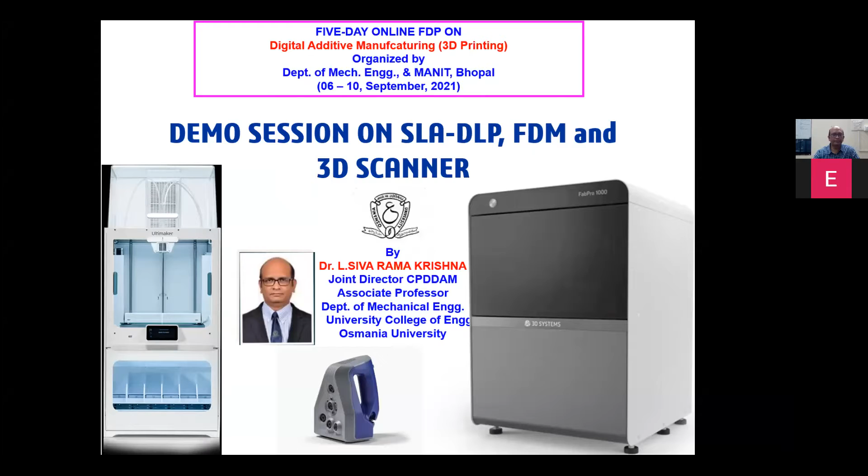I have shown and introduced the machine, how it looks physically. Since it's not possible to manufacture directly within the given time, we'll see a video already recorded showing different parts being produced using SLA technology as well as FDM technology, that is Ultimaker S5 Pro, and also the Artec 3D scan.

At this center, we have different technologies like SLM Metal 3D printer, SLS, SLA DLP, PolyJet, Ultimaker S5 Pro, and Artec 3D scanner.

We offer this to many students, research scholars, MTech and PhD students for carrying out project work. We also do it for consultancy work, etc. This is led by Professor Sriram Venkatesh, and I am the joint director for the center.

I hope these definitions and this classification are already familiar. So let us straight away start with the part machines.

FabPro 1000 is ideal for engineering and jewelry applications, small part prototypes, and direct 3D production across a wide range of high quality materials. You get high quality precision parts 3 times faster, with high throughput. It has 2 print platforms, 1 print tray as shown, connects through Ethernet cable, and supports different applications.

Basically, we have the stereolithography process. This stereolithography was the first 3D print technology ever developed in the world, developed by Chuck Hull in 1980, who is part of the 3D Systems company.

They have 3 technologies of SLA: laser SLA, SLA DLP, and MSLA. Let us see the basic difference between all these 3 technologies.

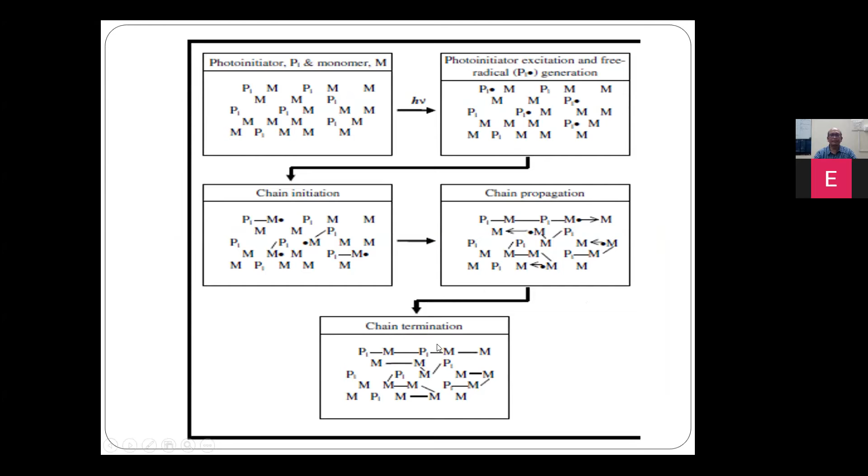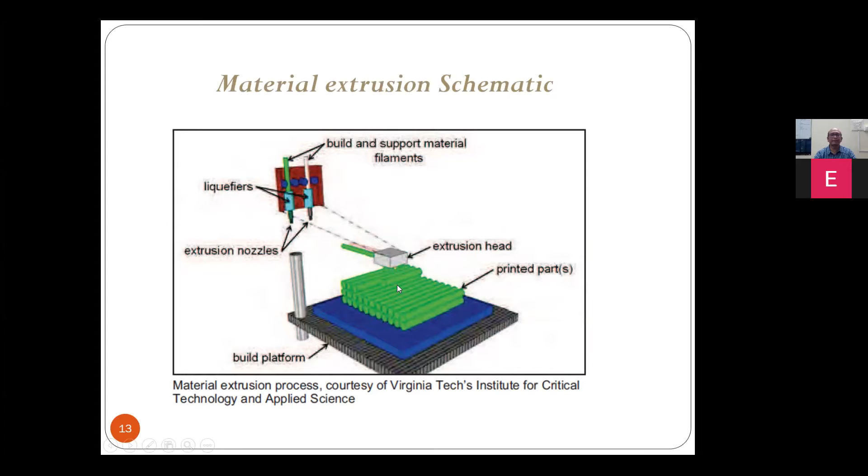And this is the material extrusion technology we have already shown, the Ultimaker S5 Pro. Basically, you send a spool of wire through two nozzles - one for the support structure and one for the parent material. Once the wire passes through the heated nozzle, it gets melted and fused. The nozzle moves in the XY direction, while the platform moves in the Z direction, combining both to give you a 3D printed part on the build platform.

From there, the information is sent to the software where the part gets built up. So we have just seen how the part gets captured with the camera.

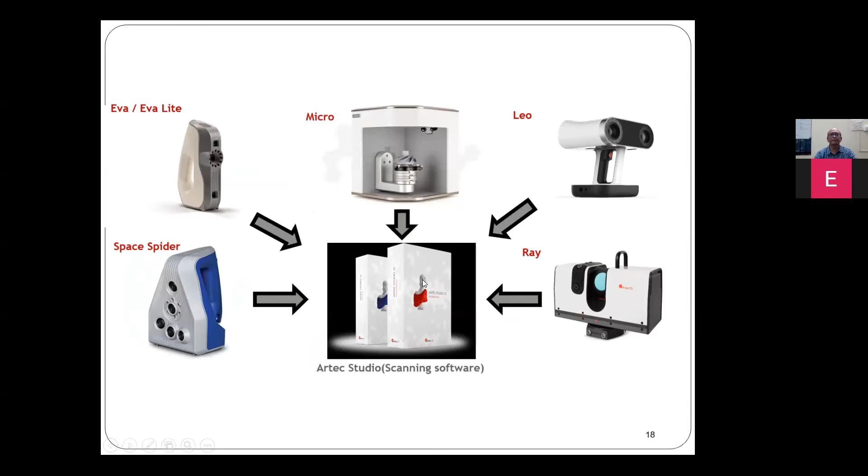There are different types of Artec 3D scanners, but we have this Space Spider model here. The software used for this is Artec Studio.

This is how the scanning process works, and once you scan it, the model you get needs to be cleaned, errors removed, and alignments done. Then you send it to the machine, produce the part, and do the post processing.

So this is what the Artec 3D scanner looks like. Let us see the different parts that you can scan.

Once you make the part as a CAD model, you can convert it into an STL file or OBJ file and get the colored parts. Once you build a CAD model, you can send it to FDM or SLA depending on the requirement, use the technology, and produce the part. These are different parts you can scan using the Artec 3D scanner.

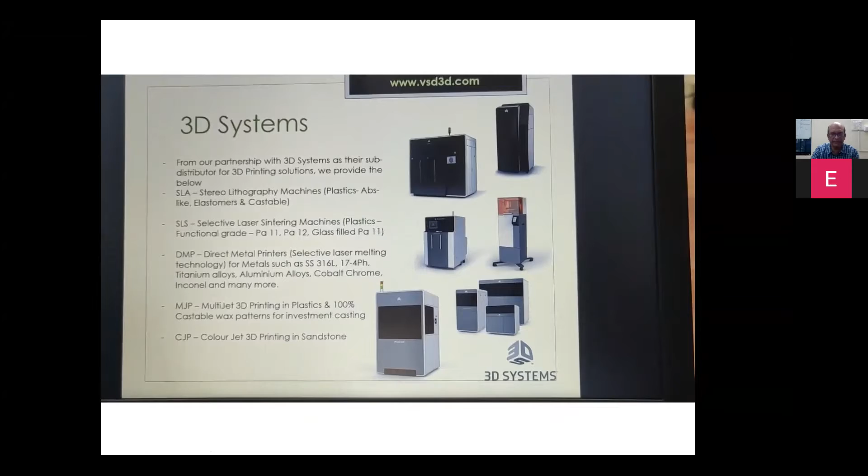3D Systems, and is the video audible? Multi-jet printing is for plastic, castable patterns, and CJP is for color jet printing in sandstone.

Today we are going to see the 3D Systems DLP SLA based FabPro 1000 3D printer, which is a desktop machine with a build volume of 125 by 70 by 120 mm. The materials we use here are Proto Gray, Proto Black, Flexible Tough Black, and NextDent SG, which is a biocompatible material. This machine is capable of not only processing the prescribed materials from 3D Systems, but you can also use any third-party materials that fall under the 405 nanometer wavelength of curing.

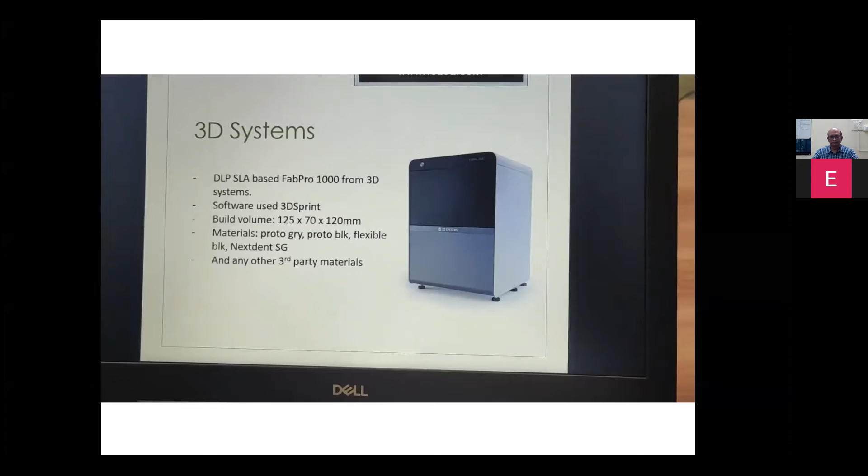So we will be taking you through this DLP SLA machine right now, and show you all the accessories, how the machine looks, its operation, and also the main software, which is one of the salient features of this machine.

It is called the 3D Sprint software. This software is one of the state-of-the-art software provided by 3D Systems, wherein you can handle all their plastic family 3D printers in one single software, and also generate reports which will be beneficial from a services point of view, and also for an institution to track machine utilization. So now we'll move on to the software first, and then the machine.

Friends, as you can see, we have designed this automotive bracket in SolidWorks software. Now we'll be saving this file as an STL file so as to move it to the 3D Sprint software. You can also save it as a STEP file and open it in the 3D Sprint software.

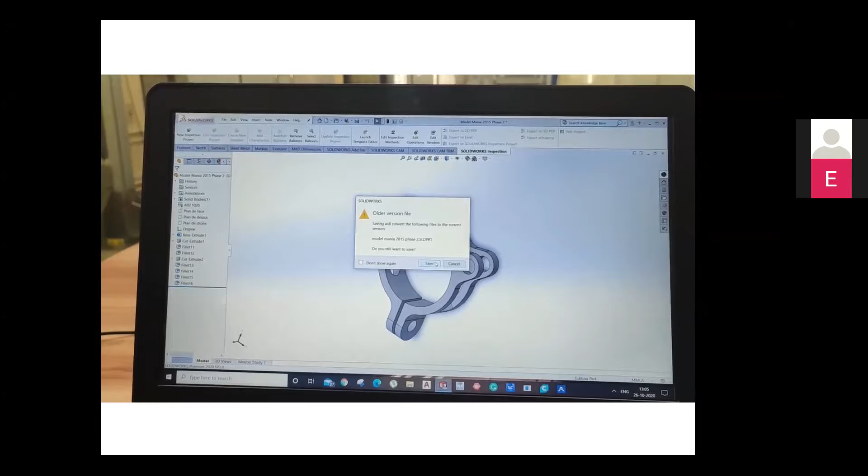3D Sprint software is capable of opening any kind of files. Even the native CAD format can be used by us to actually process the files and save them as per our need.

Okay sir, this is our 3D Sprint software. Here, as you can see, you have a lot of options like printer tools, file, generate geometry, and load reference. Various other options are not active as of now because we don't have any file.

So initially when we switch on this software, we first need to choose the printer, which once chosen will remain as the default printer for you. As we have FabPro 1000, you can see here this machine is selected as default.

Apart from these machines, you can select any of the 3D Systems plastic 3D printers from the huge array of machines provided here, so one software can handle any number of machines. So after selection of the machine, we go to the next step, that is selection of the material.

So this is Proto Gray. You have Jewel Cast, which is basically a castable resin, and then you have Tough Black, Elastic Black, Flexible Black, NextDent Model 2.0, NextDent SG, NextDent Ortho, and NextDent Model. These kinds of materials can be used, which are prescribed by 3D Systems.

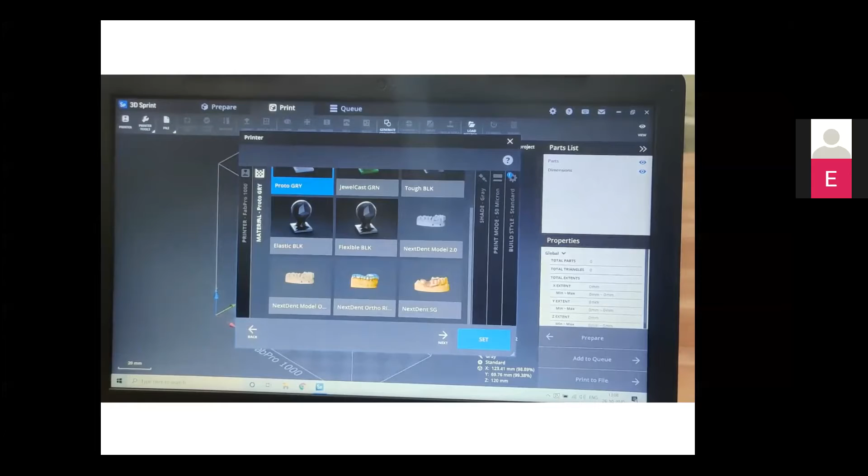Any other third-party material can also be used. So after this, since we have chosen Proto Gray here, our shade will always remain gray, that is prescribed from the machine.

Now we go and choose a print mode. So every material is basically given a default print mode. You can also create your own print mode by increasing the layer thickness or layer resolution in this.

After that, we go for the standard build style. I can have two build styles, and I can create my own build style also using this software. So presently we go with the default standard build style.

Once we set that, the software sets the whole thing and shows you the build volume of the printer. So this is the build volume of the printer, and as you can see, this mesh denotes that this is the bed basically.

And here you will have all the details of your printer: the FabPro 1000, its IP address, the material you are using, the layer accuracy you have set, the color, what mode it is working on, and the exact build volume you can utilize in the X, Y, and Z directions.

After this, we have the second option called printer tools. Now you can change the printer settings using these printer tools at any given point of time. Suppose you don't change it while selecting the printer, you can change it after selecting your printer tool.

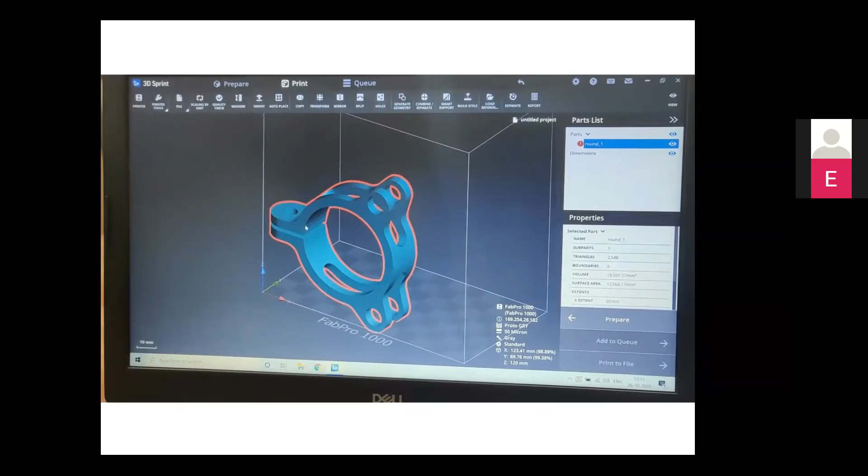So now we will use our options available here to basically take the part into the build volume and also place it according to our build styles. So first we would use auto place, an option which is used to move the file to the center or inside the build volume basically.

So if you have multiple files, all the files can be selected and you can put them in the build volume using the auto place function. Then we go to the orient function. Now this function is a very important function because it decides how you have to print the part basically.

So here you can use which optimization technique you require, whether it is the print time, the surface quality or the support area. So basically most of the time surface quality is preferred. So that is why we go for surface quality. Then the orientation is like this. Now it is moving out of the build volume.

So we can now go to an option called transform, wherein this feature helps you to move the file, rotate the file and also scale the file. So this is in move. Then you can go to rotate. You can rotate in any angle, any degree. You can mention the degrees and rotate, or you can rotate with X and Y values.

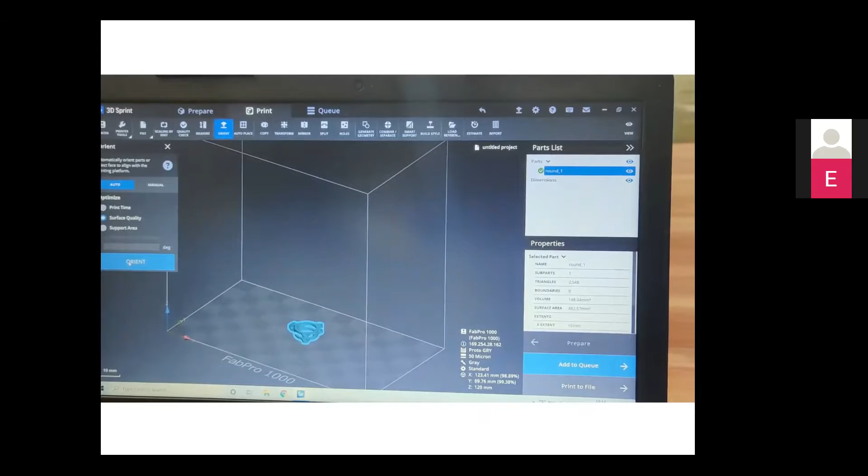Then we go to scaling. Now because the part is very big, we go for a scaling of the part, wherein we also keep in mind the timing of printing the part. So we have scaled it to 20% now. Now selecting the file again, we go to orientation and we go to surface quality, we orient it. And once we go to support area and orient it, it orients in a different manner.

So as you can see, if I choose support area and 30-degree angle, you can change the overhang criteria to 45-degree angle also. If you change the criteria to 45-degree angle, up to 45-degree angle, it will take the support structure. So accordingly, now we want a better surface quality, so we will go for surface quality.

After this, you have options like scaling by unit. You can change the scale of the unit. Basically from mm you can move it to inches, inches to mm, so for that this function is used. Then you can do quality check of the parts. The quality check will reveal wherever you have problems, whether it is in the printing volume or in the wall thickness, gap clearances, boundaries are open, or some geometrical defects. So all these the software will recognize by itself and give you the results.

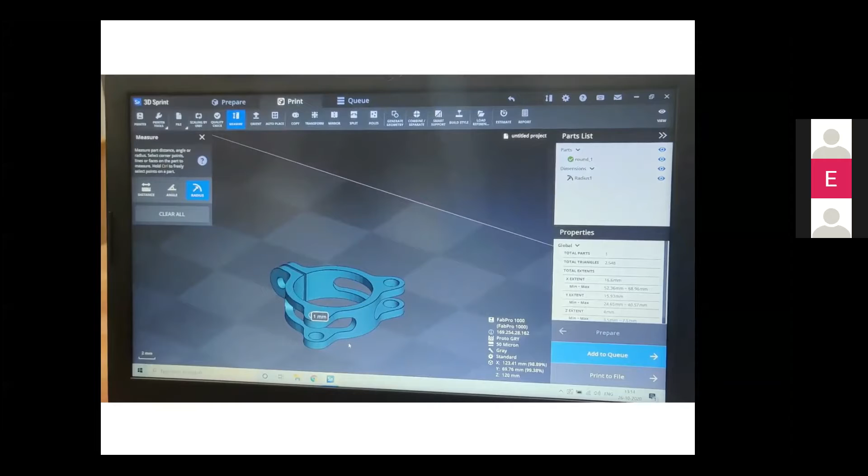Now we can go to measure. Measure is nothing but to measure from one point to other. First let's select the part. So we can measure the radius of this circle, which is 1 mm. Similarly, you can use angle and you can also use distance to measure all the measurable features of the part, basically. Now we have seen orient, we have seen autoplace.

Now copy is basically if you want to copy this part, suppose you want to make 4 copies of the part. So you can select the part and say set. So you can make 4 more copies of the same part and start working. Just say delete, like your Word file, you can delete all the files, and now we are back with one file. Now after copy we have transform.

We can transform. I have shown you scale, rotate and move. And then we have mirror. We can mirror the same part in XY plane or YZ plane or ZX plane. And then we have split. Split is an option. Basically if you have larger parts, you can split the part into 2 pieces and then print it, and later on you can join them as per your requirement.

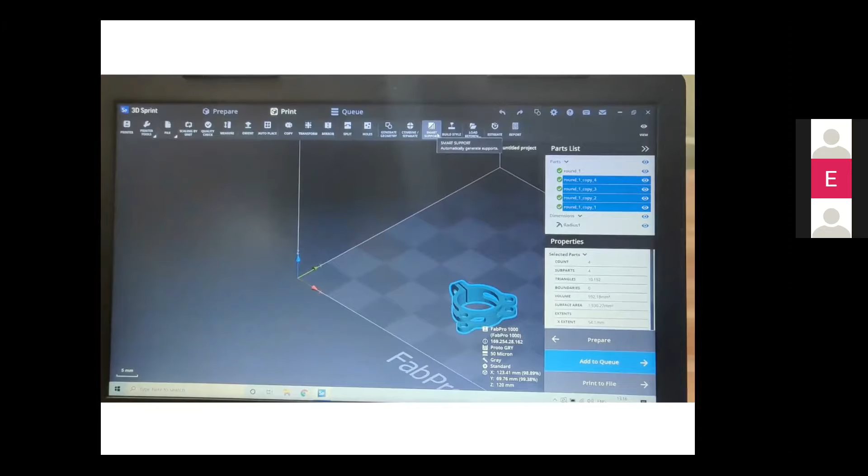Holes: if you want to create a small hole or a hollow structure, then you can use this function. And then generate geometry is basically to generate your own geometries, a box or a cylinder or something. And then you have smart support. So now we have selected this part, so we'll go to generate the support.

Now the best feature of this 3D Sprint software is that it generates the supports according to the technology, according to the part, and also according to what machine you are utilizing basically. So when we say smart supports, it generates smart supports. You can create supports. Now if you see, the supports are generated for this small part. You can see where all you have the supports in a 360-degree angle of the part. And now you can analyze your supports.

You can update the placements. So here you can analyze where all support is required. This is something which is decided by the system, so you can modify it. You can modify the points, you can add points, you can erase them. You can do all these functions in this part. And here where we generate, we can also go to the same generation and just remove the base truss. Base truss is nothing but joining the support structure at the bottom.

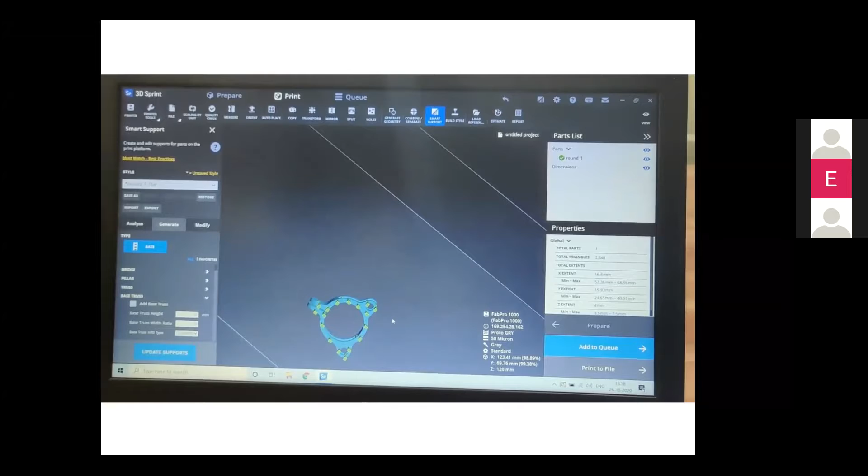So we can say 0, 0, and then just say create supports. So now you can see earlier our support structure was joined at the bottom. Now our support structure is independent for each support. Now the same way you can define the pillar thickness and how it has to offset. You can also define the bridge thickness if you are using bridges during your printing.

So you can decide what kind of supports are required and where you require them and where you don't, based on your design. So now we have prepared this file. It is in the center of the build volume and has all these support areas, supports already generated. Now we have already seen build style. We can use the same build style and we can go ahead, and then load reference is nothing but the reference files we can load which are saved in the 3D Sprint software to check the accuracy of the machine.

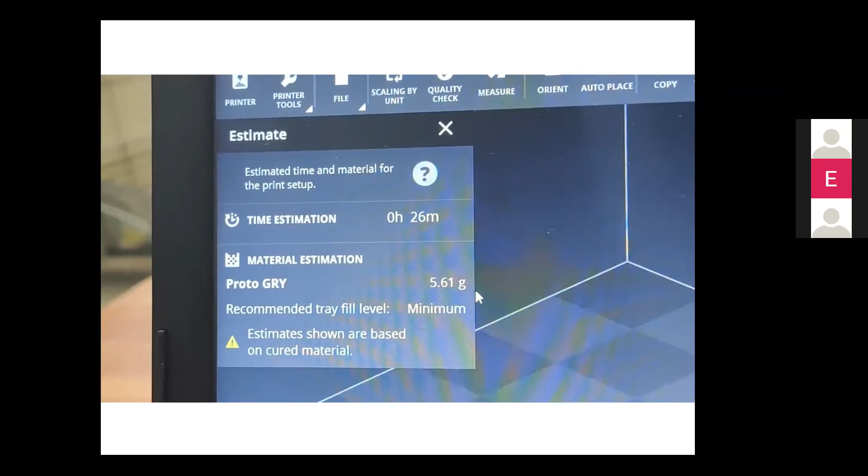And estimate is nothing but to give you a complete estimate of the printing of the part. Now this whole part, in how much time will it get prepared and how much material. So you can see here it shows you the time estimation is 0 hours and 26 minutes. Material estimation is Proto Gray 5.61 grams and recommended tray fill level is minimum. Now we'll explain while showing the machine what the tray level is basically, and what is minimum and maximum. So this is how it gives you an estimate. So with support structure, in 26 minutes your part will be ready. So this is basically the feature of estimate.

And then you have something called report. So this report will give you printer information, part properties of individual parts, print time and material estimation. And you can also save them as individual images. So you can create a complete Excel report out of this software of what parts you are printing and everything. Now to generally see what is the volume of the part, you can go to the properties section here on the right hand side corner. So here you can see the name of the file, subparts 1, triangles, and boundaries are 0. So volume is 148.04 mm cube, surface area, x extent, y extent and z extent. So this is how the part is basically understood by the system.

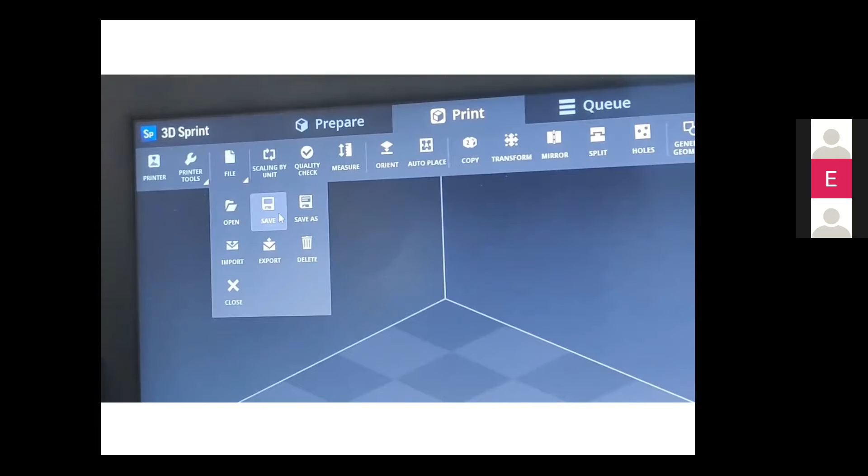So now we either can connect the FabPro 1000 machine via LAN, or we can also connect it using a USB. So basically we'll save the file and we'll transfer it. Now we have saved this file as a project in the software. Now in your system it has been saved as a project. So whenever you want you can open it for your reference.

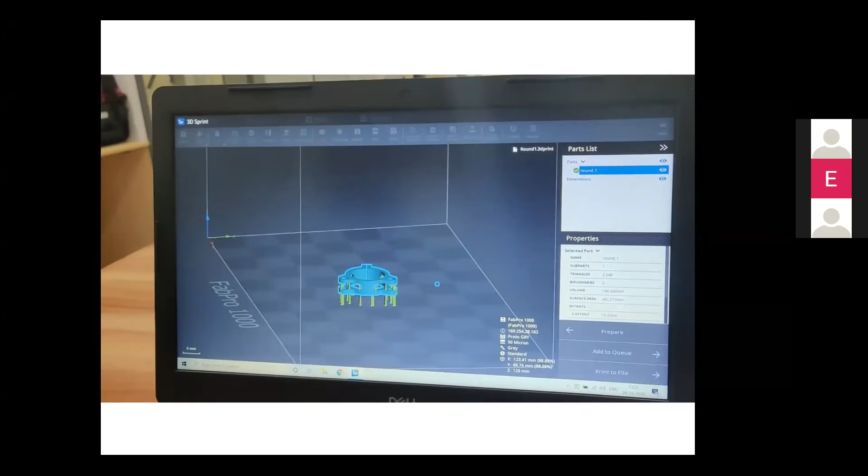Now you have 3 options here: prepare, add to queue and print to file. Add to queue is basically used when your system is connected over LAN. So once you say add to queue, it adds the file into the queue. Okay, so you can add the same job and you can rename it with your dates and everything, and you can add it. We are not connected over the LAN with the system, so we will go for print to file. So we will save this file here as a PXL file which the machine understands. So now we save this as round 1 PXL, and it is unable to connect and it saves the file. So it has said print to file is completed. So it prints as round1.pxl, and now we transfer this into the USB and we will take it to the machine.

Now coming to the machine, this is our FabPro 1000 3D printer from 3D Systems. Now you can see there is one operating button and a display screen here for the machine, and we have this material called FabPro Tough Black or Proto Gray, whatever you can use for printing the files. So today we'll be using this, and as we discussed earlier, we are operating this machine using a USB drive. So now this USB drive will be placed here in the USB port. You can also see you have a LAN port here, and this is the power port of the machine. So once you insert it, as you can see the printer is ready. So just hold the button, and it says hold button to continue to print the job.

So we have inserted the pen drive, and after a long press, now you can see the file name is being shown here, and it says hold the button to continue. So the same button we need to hold for continuation of the print.

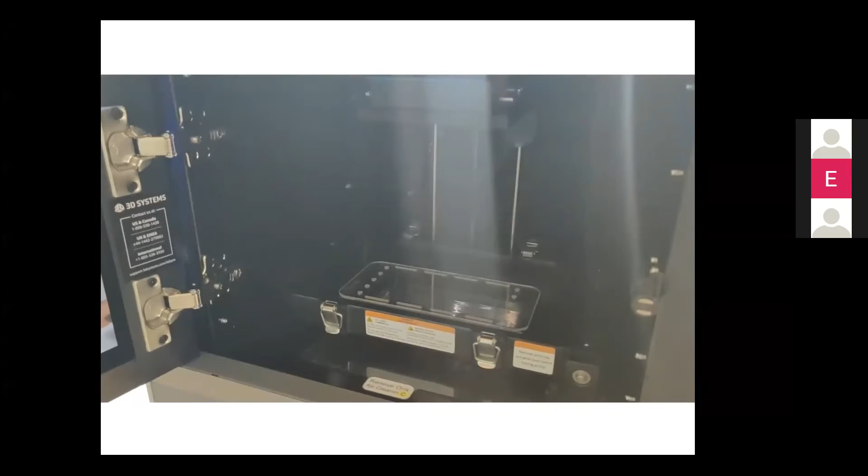Now I will show you what are the essential parts of this printer. Now if you can see this printer, this is the build area basically, and this is the glass which protects the film from the direct UV DLP light basically, and you have a DLP light at the bottom. Now you can see this is the area where the build plate is going to be mounted. We'll show you the build plate here.

Please come here. So this is the build plate of the 3D printer, and here you have a spatula to remove the parts after the print, and these are some scrapers given by them for scraping of small parts whenever you print. And this is basically a mixer, resin mixer, and then you have this, the film on which the complete resin has to be poured and the printing starts.

And then you have brush for some kind of cleaning activities. This is a tweezer for a cleaning activity, and this one also. So these are few essential parts, and this is basically IPA sprayer, and you have tissue papers. So these are few of the essential parts of the machine, and then we have some of the essential accessories which we call as the LC3D mixer.

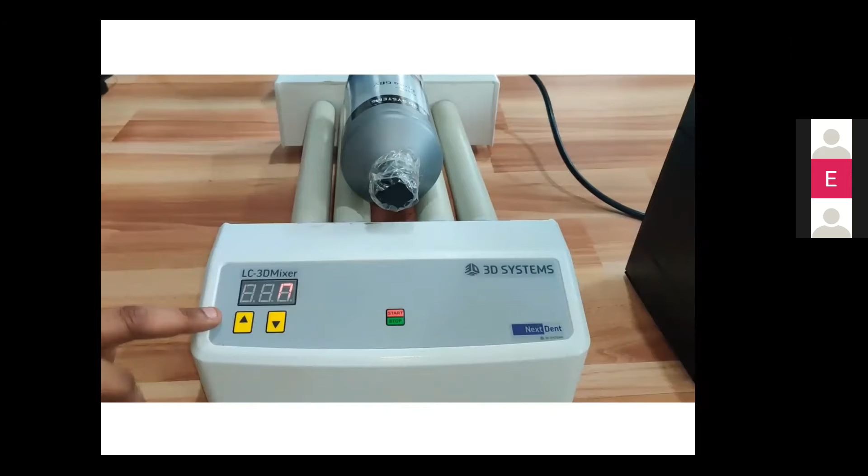This is basically used to mix the complete resins. When you buy new resins, you need to mix them thoroughly. Generally what people do is they catch this bottle and start shaking. Now that is not the real procedure to do it. You have a professional machine here which actually mixes the resin.

So we will just say start here. Once we say start, you can see how it moves the bottle in various angles and directions so that the complete resin inside the bottle is mixed.

And then we have a UV curing unit here, a small UV curing unit which uses the UV lights to basically cure your parts. You have to place your parts here. Small parts can be placed on this, or directly you can put the bigger parts on the bottom. So it starts, this is used as a curing unit.

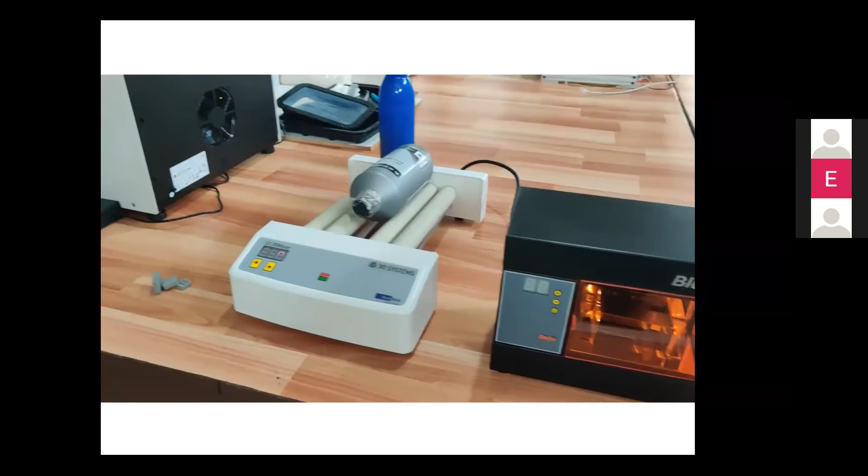So as our printer is ready now, we will prepare the printer for starting the print. So first we will mount the build plate onto the place given here. So we mounted the build plate, and this is how we lock it. So once the blue lever is pressed down, the build plate is locked. So neither the build plate can move or do anything.

So then we bring the resin tank. As you can see, it is written front here, so this should be on the front side. Now you place this resin tank onto the glass plate and then fix it using these clips.

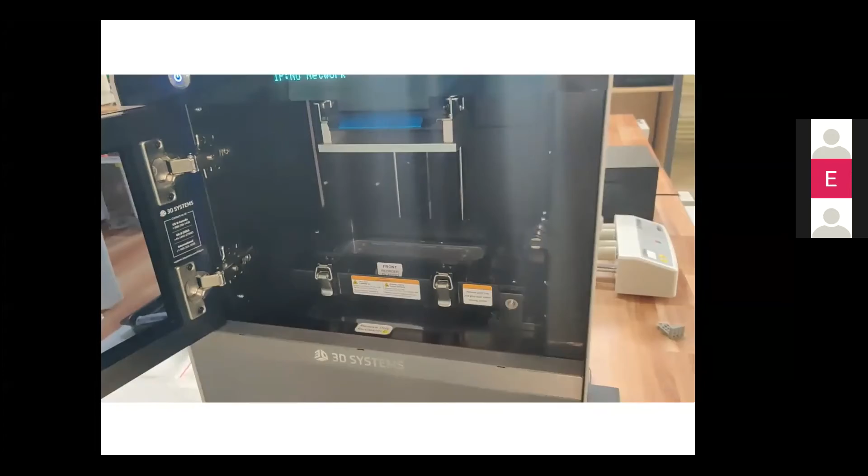Now we have to pour the resin. So now our resin is mixed completely. So we stop it, and this is a resin bottle. We will pour this resin onto the film here, as you can see.

There are 3 levels marked here, these are the 3 levels. This is level minimum, this is middle level, and this is the maximum level till where you can fill the resin. So as in our build it was said minimum, we will fill the resin to the minimum level. So once it is filled to the minimal level, we will remove the bottle.

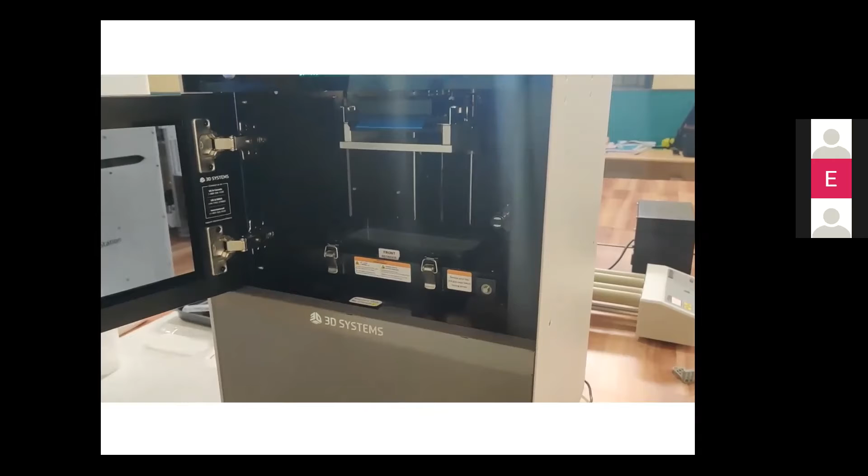Now you can see we have selected the file round 1 PXL. Now once our build is ready, the platform is ready, everything is ready, we just stir the liquid a bit using this stirrer which is provided by 3D Systems, just to have a uniform printing style in the whole resin.

Do remember, whenever working with your resins, you should always wear gloves, because these resins can harm your hands at any point of time. So basically now we have put the file using a USB, and now we hold the button and the job is loading. Once the job is ready, we'll also hold the button once again to start it. So it's verifying the build.

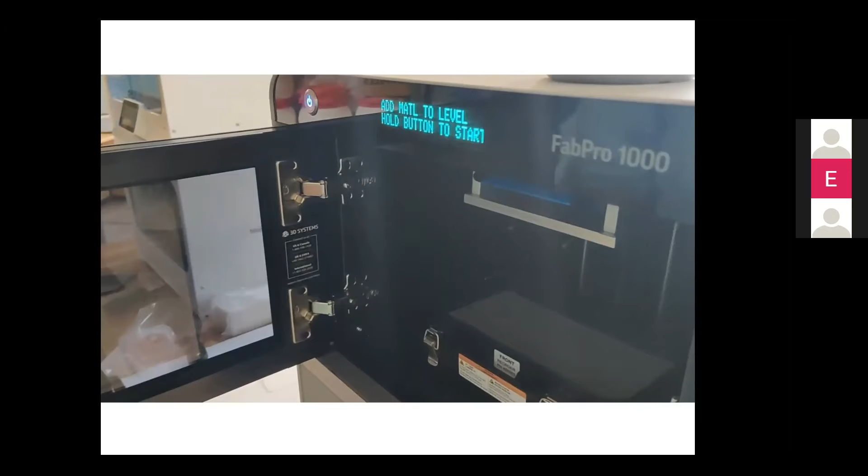Now it says please scan the material. Now if you can see, there is a red light here and we scan the QR code of whatever material we are using. So once it recognizes, it says add material to the level and hold the button to start. So we have already added the material, so we will hold the button to start.

So it gives you the printing timing. Now close the door and leave the machine for printing. See, the build plate goes down and gets dipped into the resin to start the print.

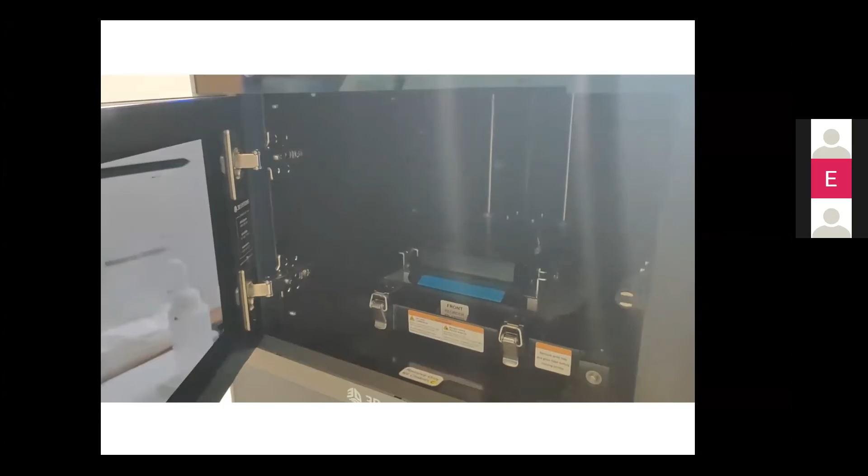Now the printing has started. So the first layers will start getting printed with the UV light from the bottom. It will cure the resin, which will stick onto the build platform and make the part. You can see it keeps updating the printing time and also the percentage. So you can see it is 5% done and 21 minutes remaining.

So now we'll see inside how it is printing. Now you can see this moves in Z direction, and also the bed moves in Z direction. And from the bottom the UV light actually cures the material to stick onto the build platform. This is basically how the printing is done on these kinds of machines.

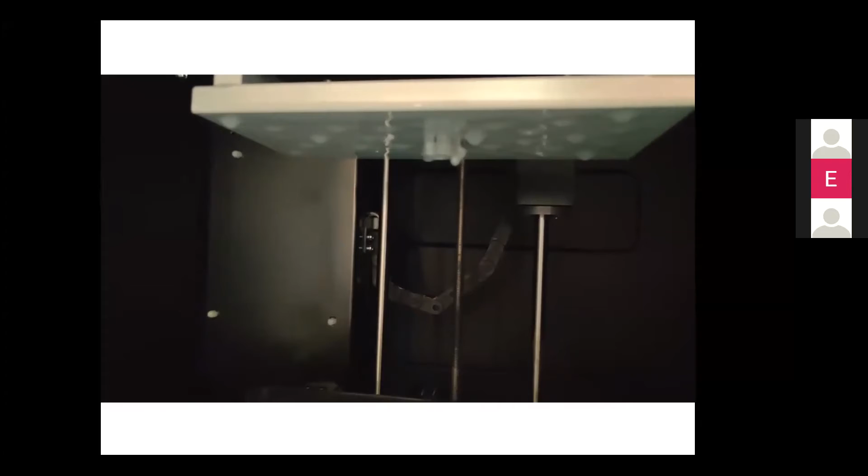So the part is printed, and this is how the part has been printed onto the build platform. Now you can see the resin dripping onto the build platform. That is the extra resin which drips. We have printed a very small part just to accommodate our timing. So that's how the part looks. Once the material drips completely, we will remove the part from the build platform.

Now we have removed the part from the machine and it is built. We will pour IPA onto it to basically clean the part, and then we use this spatula to remove the part. Now we have to dry it using a tissue paper.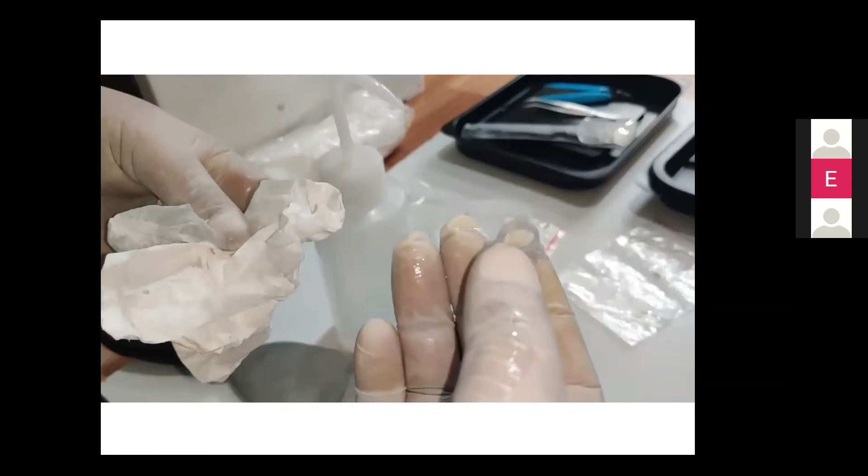And now you can see the part has been printed. The very small features of the holes are also printed perfectly by this 3D printer. So now we use the tweezers and various other post-processing equipment to remove the support structure.

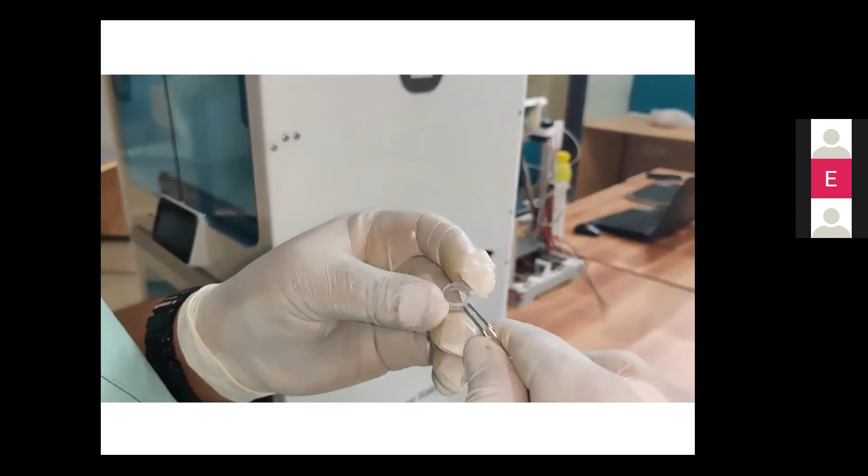Now after the part is completely cleaned, we take it for post curing into the UV curing unit. This is our UV curing unit. We place the part in the UV curing unit, close this and set the timer. It ranges between 45 to 60 minutes. You can start the curing.

So you can see, the blue light starts curing the parts inside the curing volume. We have a reflective surface at the bottom. These reflective surfaces are basically to reflect the light from all angles onto the part.

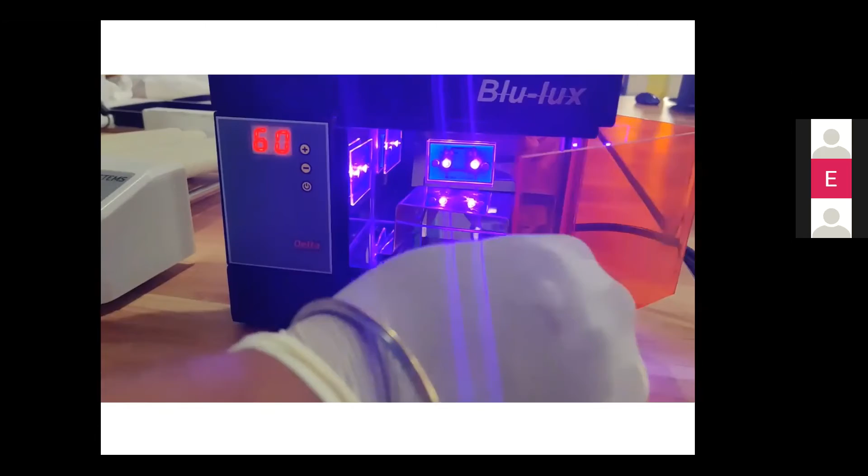After the curing is done, you can take the parts and start using them for your commercial uses, basically for automotive, for testing purposes, for prototyping and for design verification. You can also use them in basic engineering jobs, and you can even make architectural models and medical models. It depends on the application. After post curing, you can move it ahead for your prescribed application.

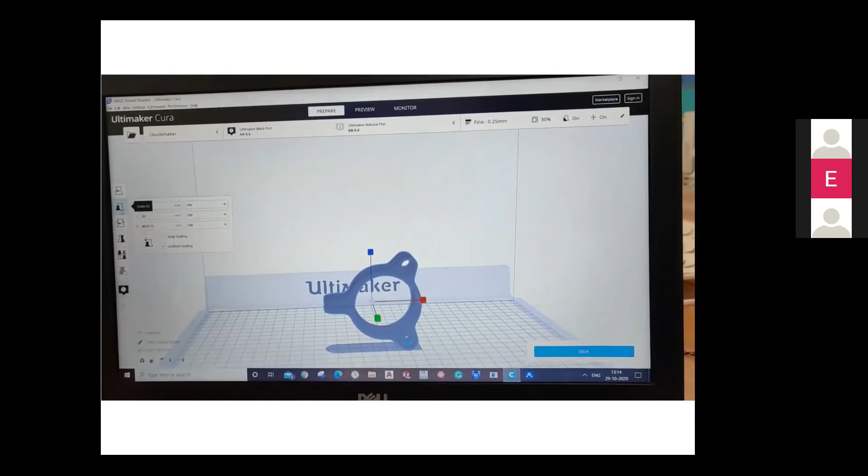If you increase the model by a certain percentage, you can go for uniform scaling. You have an option called uniform scaling. This uniform scaling option lets you increase the part uniformly in X, Y and Z. So you have the opportunity to increase the object in X, Y, Z uniformly. This is how you can increase or decrease the size of the file uniformly.

And then we have one more option called rotate. In the rotate option, if you see here, you have three colors of circles. If you want to rotate your part in one direction, you can take that particular circle and rotate it. And if you want to rotate in another direction, you can rotate with another. So we have three colors here, green, red and blue. This way you can rotate the part.

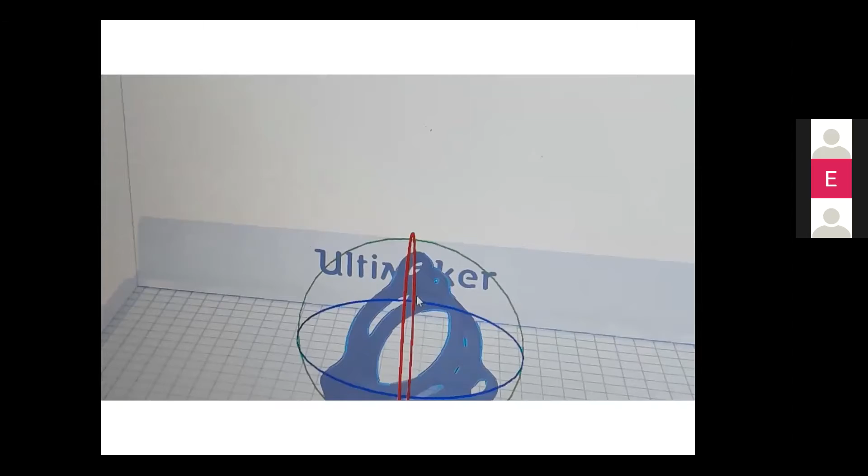In this Cura software, you can even use the mirror command and make one more part in the software. That is also possible. Then we have one more command called model settings. In model settings, you can increase or decrease the mesh of the component. These are the good features of Cura: even where you cannot do it at the design level, we can multiply, increase or decrease the size, and all settings can be taken up.

Next and last is support blocker. In support blocker, we can have the manual setting done: you can manually set the support at that particular point, and we can control the complete settings, because we have an automatic setting anyhow. If you feel the automatic setting is taking a large amount of material, you can take the manual support option and use it. So these are the settings here.

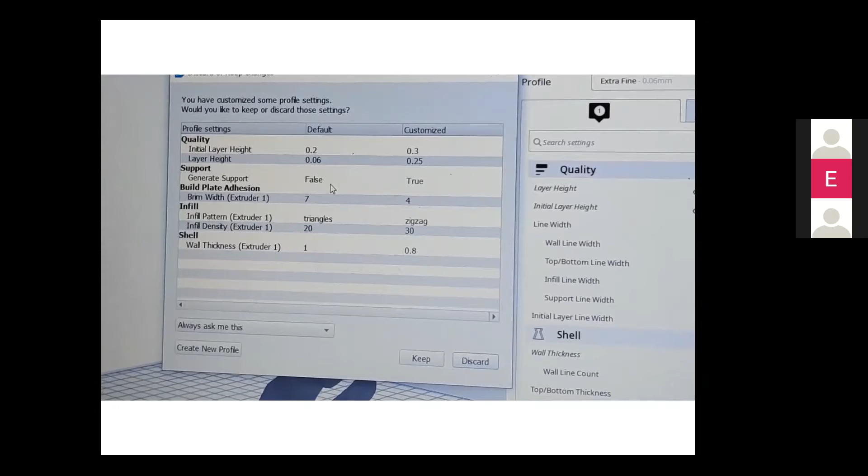Next we are coming to the main part. If you see very clearly here, there are multiple settings in these settings parameters. In the profile itself, Cura is a wonderful software which gives predefined settings of extra fine, fine, normal and fast mode. If you want still finer control of each and every setting, we can take any setting in this particular screen. Once we select the profile settings, we can have the default settings or customized settings.

If you see here, 1 and 2 are shown. Here 1 is extruder 1, 2 is extruder 2. When you are giving one material and its own material is being used as the support, you can take that particular thing as the support, and the same extruder does the same thing. So in this way, you can change the settings. For example, in the basic settings, as I explained previously, you should be very careful about top, bottom, shell and infill areas.

And one more important setting is speed. Speed parameter plays a very crucial role in 3D printers.

So if you see the quality parameter here, we have layer height. Layer height is the distance between one layer to another layer. Don't get confused, it is not the thickness of the layer, it's the distance between one layer and the next. We can set this from 60 microns to even 600 microns.

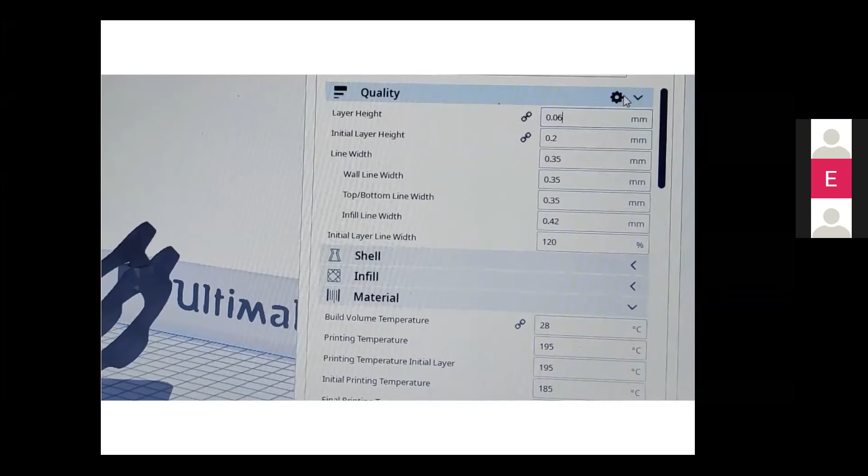Depending upon your quality requirement, you give the quality setting. This is the first and foremost setting you have to give. If your speed is slow and your layer height is less, you get excellent quality. If your speed is high and your layer height is more, you get the poorest quality.

Then after this, we have the shell. Shell is nothing but the area which is visible to your human eye. So you have to give the thickness of the wall, or the visible wall - whatever you are seeing, that particular wall thickness has to be given.

In this, we give shell settings as these parameters: wall thickness as 1mm, wall line count as 3. Wall thickness should be maintained with the nozzle diameter. If you are using a 0.4 nozzle, you have to take 0.8, 1.2, or 1.6 - it should be multiples of 0.4 into the number of walls you take. Then only your thickness will be good, and you will have a good, solid part in your hands. So this is the shell component.

And then we have one more setting called infill. Infill is nothing but what is not visible after the part is printed. Bottom, top, shell and infill area - whatever we are seeing, the infill area is to be given with the time constraint and also the materials and functionality of the part you are looking at.

You can maintain the fill density from 0% up to 100%. If you want a solid part, you have to maintain 100%. If you want a hollow part, you have to maintain your infill as 0%.

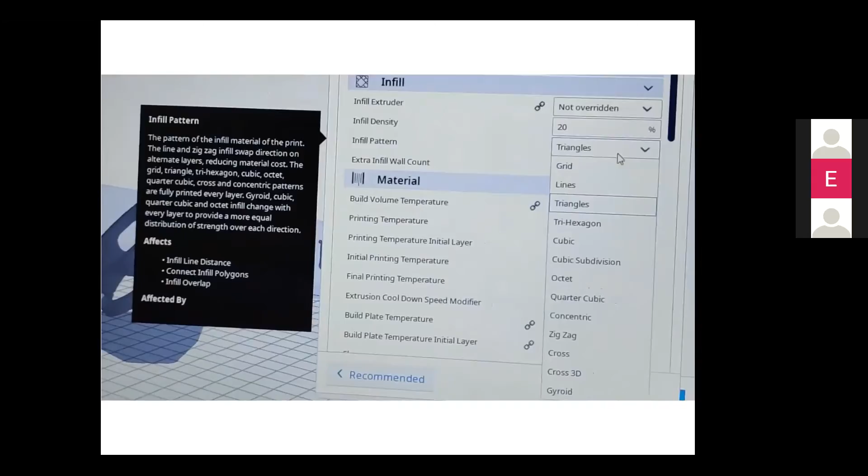And then the next important parameter - we have multiple patterns seen in this. If you see, we have triangles, grids, lines, trihexagons, cubic subdivisions, octet, quarter cubic, concentric, zigzag, cross 3D, and gyroid.

In these settings, the most important one is trihexagon, which gives excellent strength to the part. So always use trihexagon for quality. If you want normal strength, you can use cubic, or you can use lines - lines have very less strength compared to trihexagon.

So these are the major important parameters of infill percentage and infill pattern. It's always important that the infill extruder should be non-overridden - it should come as per the settings which you have given. It should be taken as per your settings. It should not be overridden, you should not fix it.

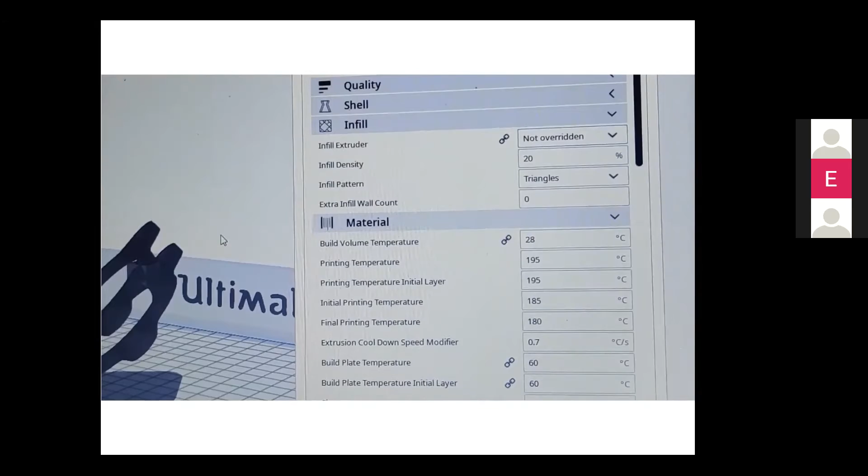You should fix extruder 2 only if you are taking one more material, like PVA material, in the second extruder. Then only you have to fix your infill, or fix your support material in extruder 2. In infill, it's always better to have the same material and same extruder used for the infill area to get good quality. So this is up to the infill.

And next one is materials. The material should be the same as what you are giving here, and also the material which is being inserted into the 3D printer.

And next one is speed. Speed is always an important parameter. When you want the highest quality, try to maintain 30 mm per second. If you want normal quality, try to maintain 50 mm per second. If you want fast visual purpose or look and feel purpose, go for 70 mm per second. So this is the speed parameter you have to maintain.

Also, for example, if you are going with some corner surfaces where your topmost surface doesn't have many layers, you have to decrease your top layer speed as low as possible, down to 10 mm per second, to get the highest quality of the object. When you have the bottom with sharp edges, try to give a very slow speed for the bottom.

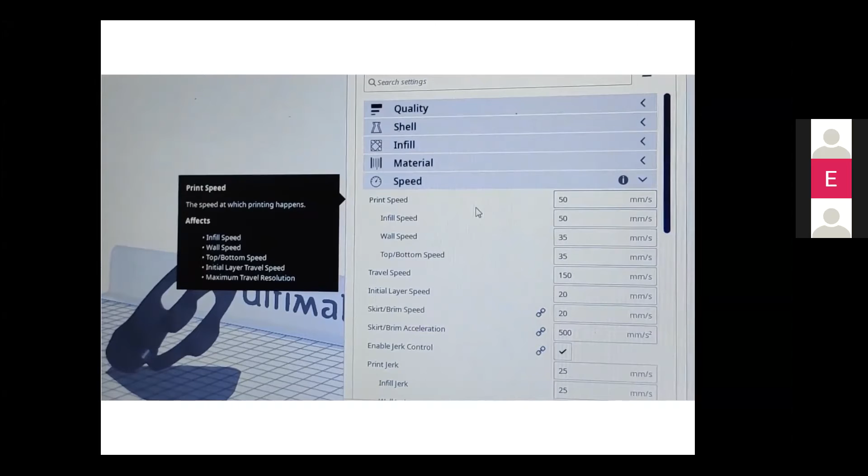So these parameters can be edited and it is easily understandable in this Cura software. So this is the speed parameter which I am looking at. And next one is travel.

Travel setting is when the material is extruding from the nozzle, but when it is traveling from one place to another where there is no need of extrusion, retraction settings play a very crucial role. The extruder motor pulls back the material to make sure it doesn't extrude where not required, or else you will see an oozing phenomenon.

Next is cooling. By default, always enable the print cooling system in the parameters.

Next is support phenomena. Be very clear where you have to give manual supports or automatic supports. Always take automatic supports and make sure your slicer itself gives you the output.

For the support concept, you can use extruder 1 as the main material and extruder 2 for supports. This is extruder 2 material and this is extruder 1 material. If you are using the same material for supports, always generate the supports using the same material. If you want intricacy or complex parts, always go for PVA material to get the quality done.

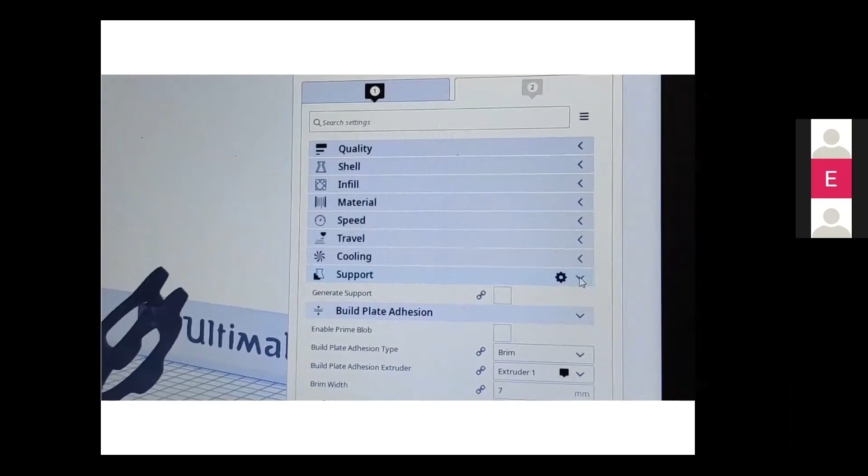After printing, you have to keep the part in water at 50 degrees centigrade where the PVA material will melt out and you get the actual part out.

Be sure which material is in which extruder, and which core is in which extruder. Make sure you have BB core in the second extruder and AA core in the first extruder. This is very important - whatever settings and parameters you give in Cura software have to match the hardware components like extruder or material. These two play a very crucial role.

Do not give PLA material in the software and then input ABS material in the printer. That may damage the printer and also there is a chance of clogging of the core. So this is how the support concept works and how the hardware component works.

Last and final is build plate adhesion. Depending upon your requirement, if you want the highest quality on the base of the part, always go for the raft. There are other options like skirt, brim, raft and none - always concentrate on getting good quality with raft.

Brim can be used when you have any sharp components at the base, or on the bottom of the part.

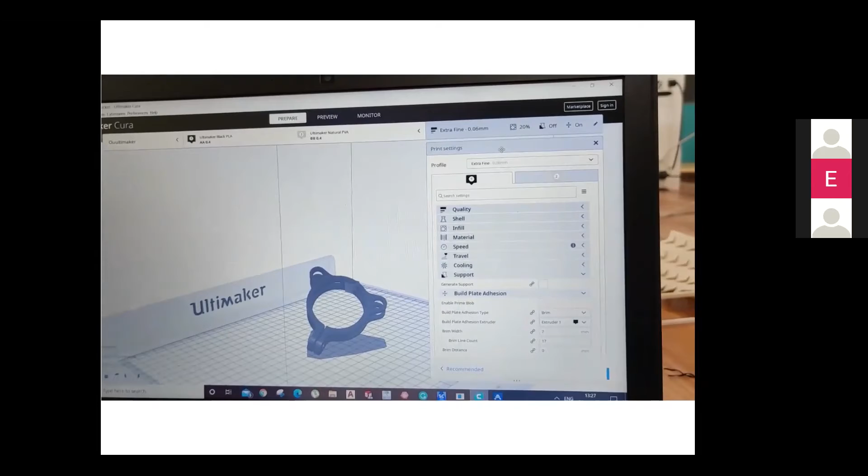If you see all the components here, this is how the extruder settings will be. So we will close this and go to the hardware now that we have already frozen all our settings. Then we are going to slice the part.

This is how we load the part, and now that I have already given certain settings, I am going to slice the part.

This part is now showing a total print time of 7 hours 9 minutes. So we are now just checking the preview of how this slicer is going to work.

If you see here, a lot of oozing is happening. There is a lot of support material, so we did not give our supports properly.

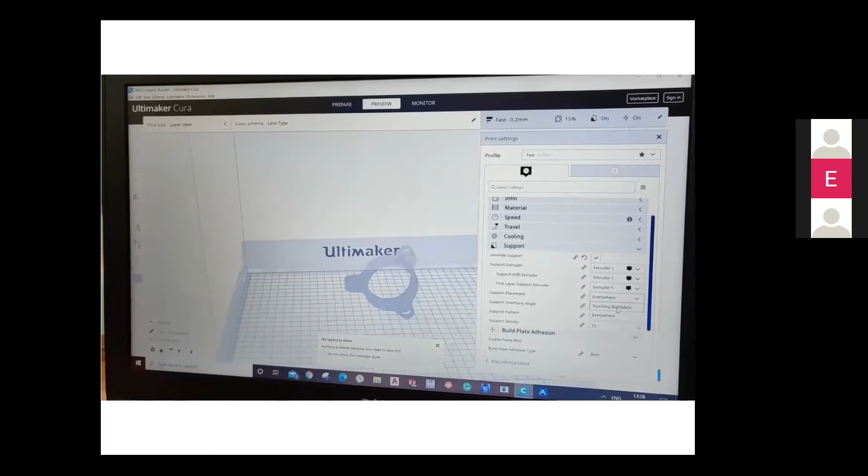Generate supports, then no need of extra fine settings - let us go for fast setting. Generate extruder everywhere, and always give us touching build plate.

So this will be coming to 2 hours 3 minutes, 20 grams of material. If you see the part here, this is how it looks.

We have taken only touching build plate. If you change your settings, now you get the supports wherever required.

If you want to go for a preview, we can see how the nozzle will be working from one point to another point to get the part like this.

Right, students, so today I'm just going into the hardware right now. So to this we have generated the G code. Once you click save the file, you get your G code generated, and then we are going to save the G code to the desktop.

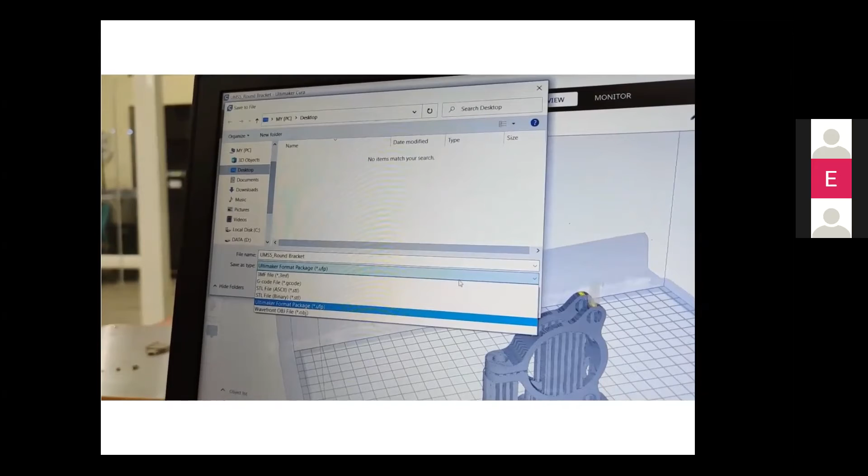Ultimaker has a format called the Ultimaker format package. We are just saving the file. Now the file is saved, and the file is ready for printing. So in those settings we have saved the file.

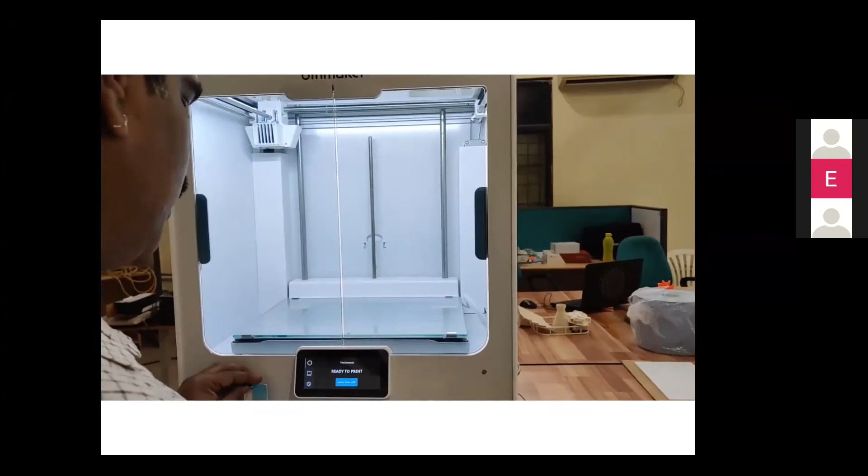This particular file, whatever we have got, now we are taking the G code or Ultimaker format file into the pen drive, and then we are inserting the file into the 3D printer. This is how the 3D printer works—once you save the file in the 3D printer, after we insert the pen drive, the next important feature is we have to see what are the hardware configurations of the Ultimaker.

This is one of the world's topmost 3D printers, the Ultimaker S5 Pro. This comes with a build plate and an enclosed chamber. It has a two nozzle setup, AA 0.4 and BB 0.4. AA is for normal material, BB 0.4 is for support material.

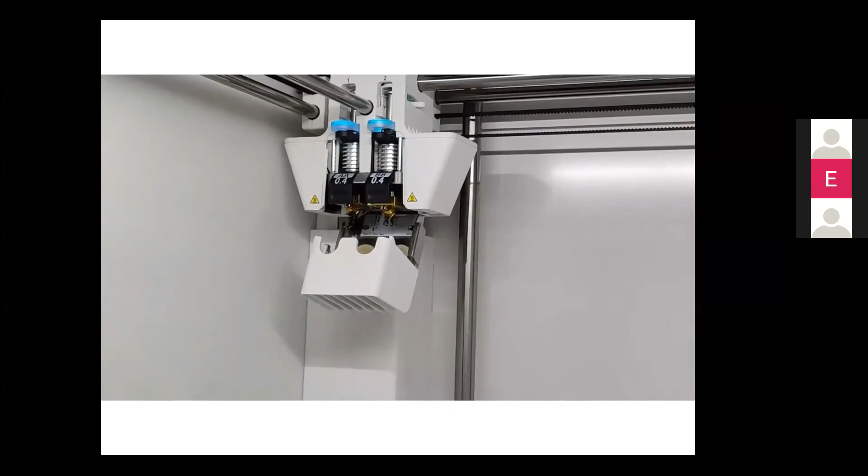These two are the cores. These cores can be removed like this—this is called a core. This is how we insert the core into the printer. You can close it like this. This is an automatic swap changeable nozzle. Once we change it, the printer automatically switches from one nozzle to another depending upon the print parameters. So this is how the printer will look.

And then here we have material loaders. We can always keep a material station. In the material station, we can keep six spools inside, whatever the requirement and whatever material we have. For example, here we have kept one material called Tough PLA.

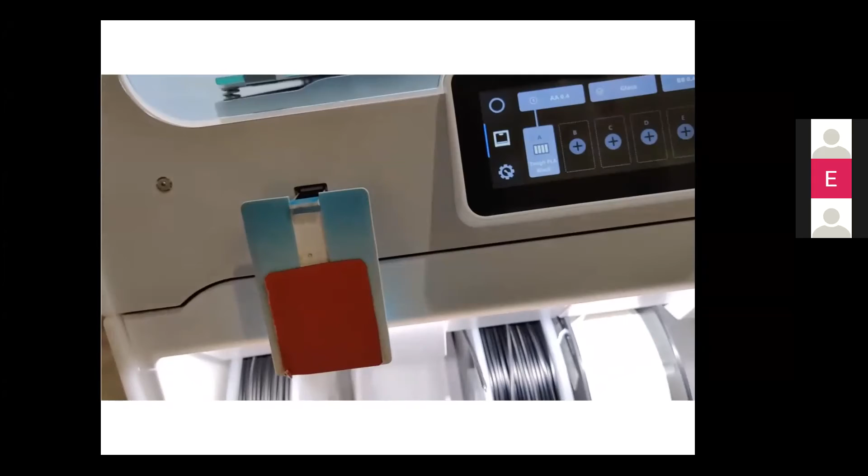Depending on your requirement, we can directly take the material—right now I am loading the PLA material. We can insert it into this hole, and then keep the material inside it, and then switch this button. It will get loaded up. This is how we loaded the material. Then click this button, and now the material is going inside. Once we insert the material, it just catches the material, and then it comes to the screen here.

This is how it will be looking. This is the basic screen. In this, we have the material loading option—A, B, C, D, E, F. So these are the materials. Whatever we see, this is the material station, A, B, C, D, E, F.

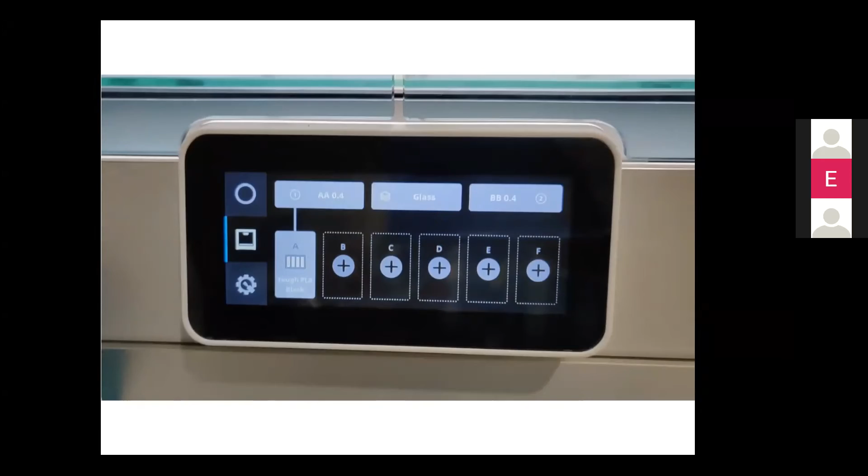We have a lot of printers which come with other material stations, and it will be an independent one. Here in the Ultimaker S5 Pro, we have multiple stations integrated into the 3D printer, and the system automatically takes the material through its input settings, which we have here in the material station. So this is how the complete setup will look.

And then next is the settings, maintenance, and network. In settings we have normal user interface settings: language, flow sensor, display, frame light, developer mode, and allow anonymous data collection. In this, all the certifications for this 3D printer are also included.

Air manager—what is the air manager? In this setting, we have a setting called air manager. This addresses one of the biggest problems in 3D printing: warping. This air manager helps maintain the temperature with that particular atmospheric temperature, which makes the print quality come out good, and the parts' quality come out good. So these are the settings parameters.

And then we have maintenance. In maintenance, we have upgrade firmware and print head. In print head, we can have calibrate lift switch, home print head, print core cleaning, print core peeling, and calibrate XY. These are the settings which are already predefined.

And then we have build plate. Build plate also has leveling—right now it is automatic mode, but we also have manual leveling and move build plate. We can take manual leveling depending on our requirements.

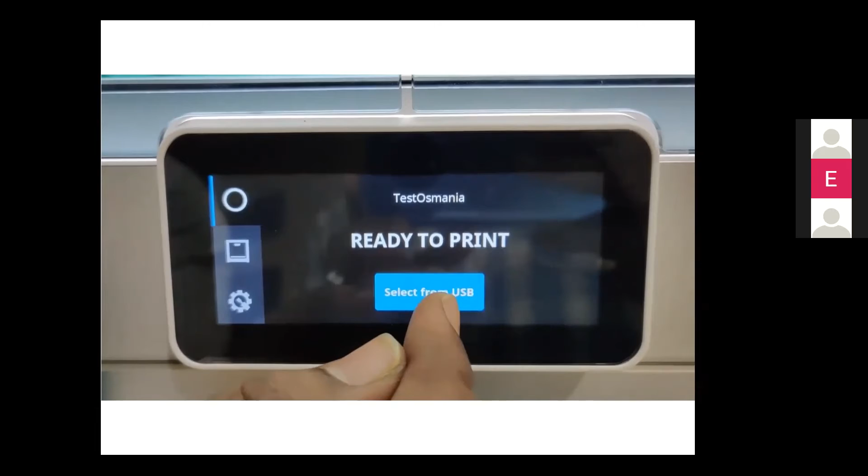Right now we are going to start the print. You can observe we are taking the print, selecting the file from USB. We are taking the file, whichever file we have done the G code for, we can select it. After we select the file, it shows how much time it will take for the printing.

So now you can see the auto bed leveling process is going on. After the auto bed leveling process is finished, then printing will start. See, here you can see it in the display.

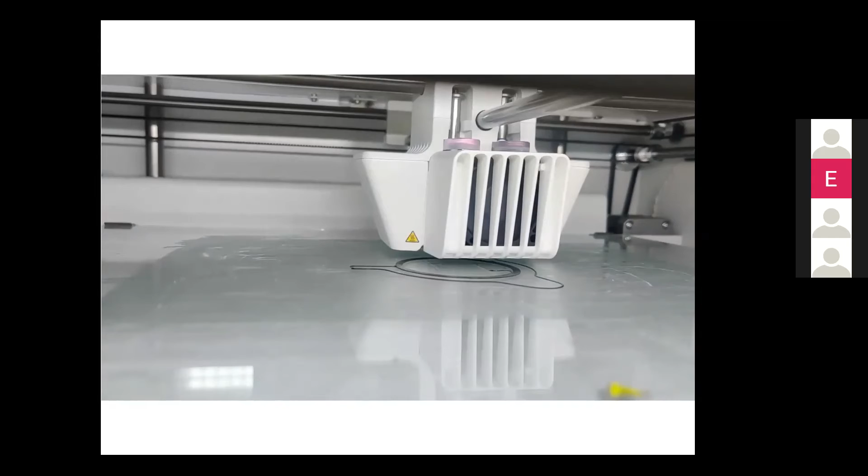See, now the printing has started. It's printing the initial layer as well as the brim also. You can see in the display. Initial printing, only the initial layer is printing.

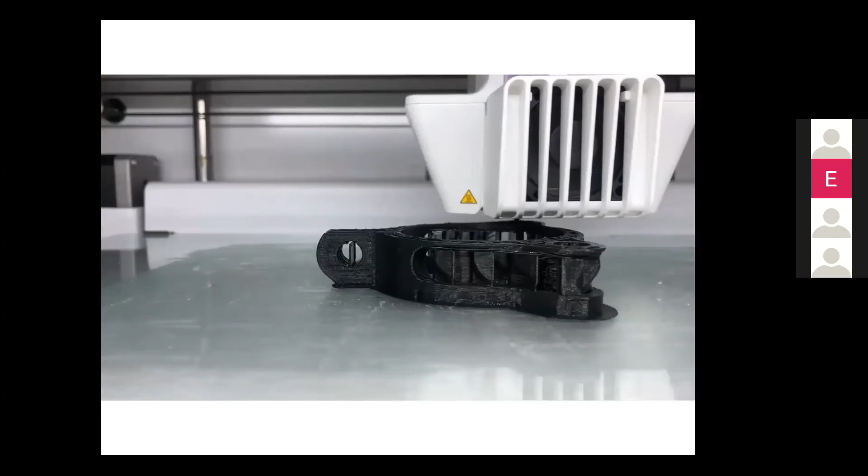If you see the printer printing the outside parts, it is printing with slow speed, meaning the shell is being printed with slow speed. And if you observe the printing slowly, you see the infill speed I have increased, and there is no need of quality there. So the printer automatically increases its speed when it starts printing the infill area.

Now you can see the speed of the printer is increased and it is moving much faster compared to what you have seen. Now it is printing the infill, so the speed of the printer has automatically increased.

If you see, now the topmost layers of the part have started printing, and the printer has slowed down a bit, and it is printing layer by layer very slowly so that your quality of output will be good. Top layers have started.

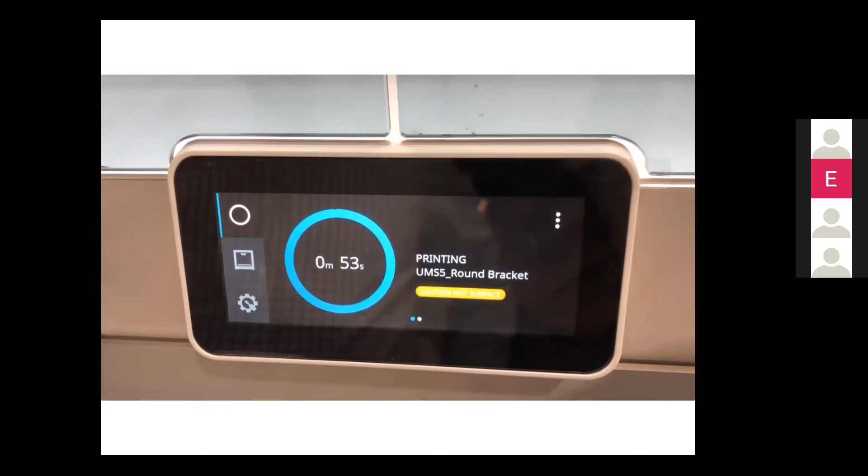So guys, now the print is getting completed, and you can see the final top layers of the 3D print are slowly getting completed. So the final layer comes into play.

Now the print gets completed. Once the print gets completed, you see the build plate gets released, and then the print completes, and the finishing screen will be shown like this in the printer.

After the print gets completed, the next process is how we remove the part from the build plate. Now the print is completed. So this is how our print is completed, and we can remove our build plate like this. This is how the print will be looking.

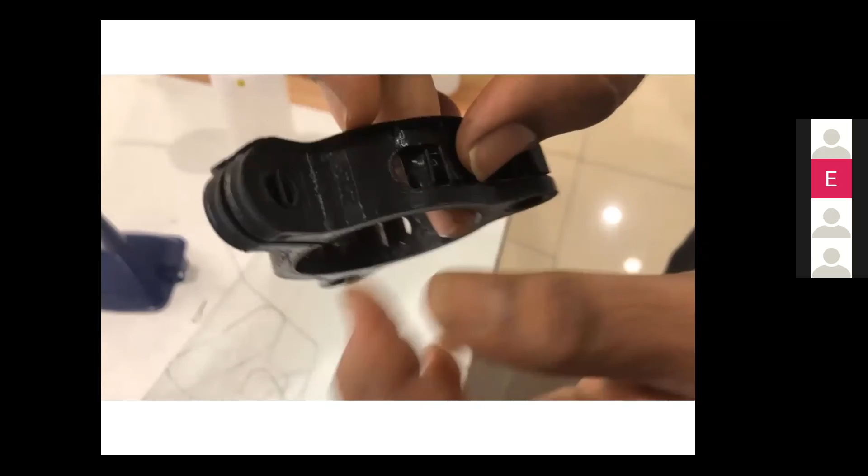So if you see, the build plate can be plucked out. This is how the part will be looking. This is how the supports have to be peeled off. You can see the part has minimum supports. We just remove them like this. Just remove like this. You are done. Your part supports are removed like this.

And here, supports are very delicate honeycomb structures which are easily removable.

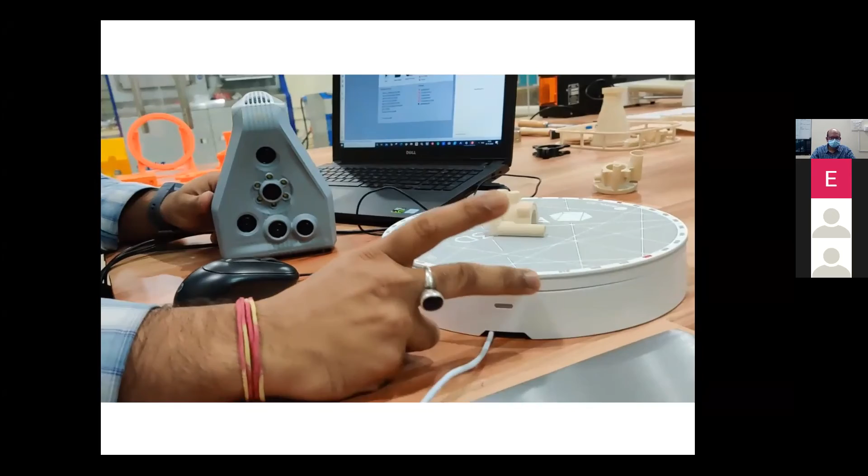And these are all the equipment. See, this is the main scanner. This is what we call the turntable, where we can place parts while scanning. And this is the power backup. When we go for outside scanning, that time we can use this lithium ion battery.

Anyway, now we connect this scanner and this turntable through our main power plugs. Okay, so the first thing is, when we're going to scan any part, we have to connect our scanner to the main computer where our software is installed. The software is Artec Studio, and we have to connect this scanner to the main system, as well as connect this turntable with this laptop via Bluetooth.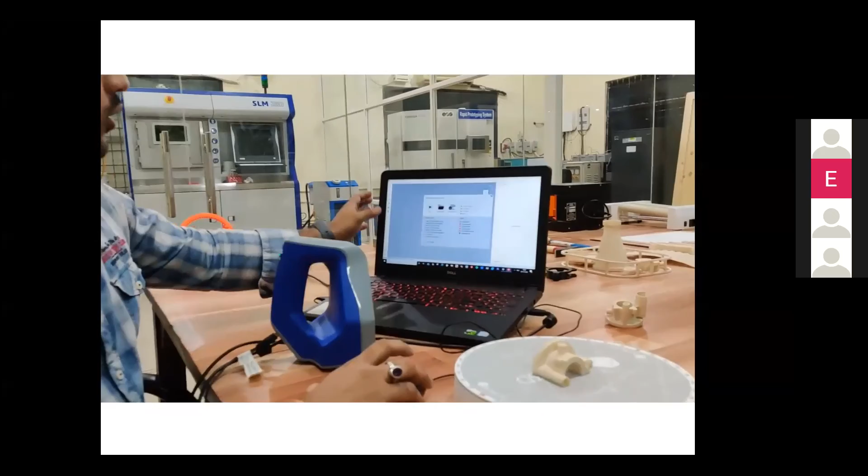So now today I'm going to show you how to scan. See, I already opened the software. This is the software interface. Before going to the software interface, I will tell you a little bit regarding this scanner's specifications. This scanner works on a blue LED light source. See, these are the LEDs. These LEDs emit blue light, and these are the cameras. These are all the cameras.

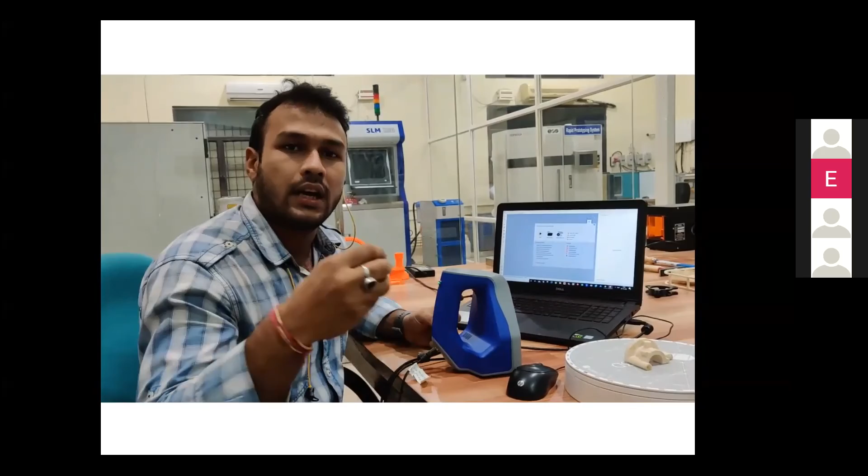The 3D resolution of this scanner is 100 microns, and when it comes to point accuracy, it is 50 microns. And this scanner's recording speed is up to 8 fps, 8 frames per second. Now I'm going to the software interface.

See, I already opened this software. Here three options are there. One is scan, second is open project, then import from Leo. Leo is another scanner. So to scan, we have to click this scan option, or else on the scanner you get one switch over here. When you press it upside a single time, it starts previewing the model. See, I'll select this button.

See, so we have selected this part. This is an SLS printed part, printed in our SLS machine. We selected this part because of its medium level of complexity. So we place this part on the turntable. Now you can see in the screen it starts previewing the part.

So here you get another option, record. You can click on record, or on the scanner press the same button upside a second time, then it starts recording the scan. For the first time I will click on the record button in the software. Now you can see it starts scanning the part. In the screen, the green region is the optimum scanning region, and on the left side you can see one bar where 170 to 300 is mentioned.

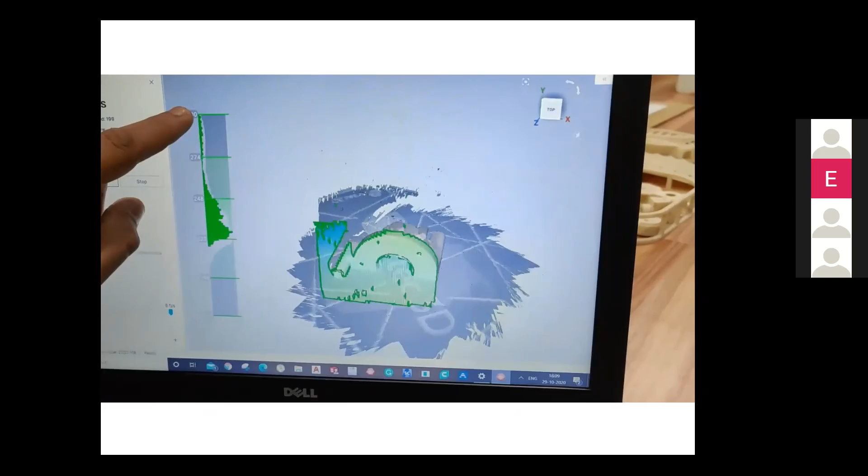So what is this all about? 170 is the minimum distance you should maintain between the part and the scanner while scanning. And 300 millimeters is the maximum distance to scan any part. So now I am scanning this part. See, while scanning, I am maintaining the graph.

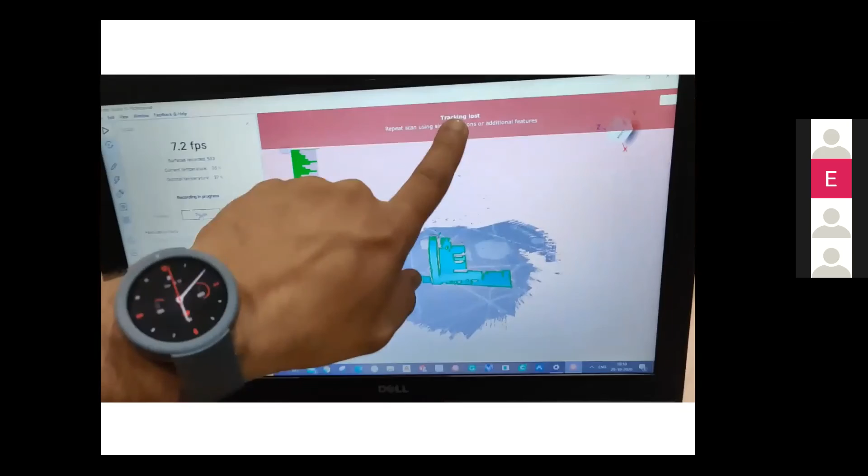See, when I go farther than 300 mm, it starts showing object is out of sight or tracking lost. That means your scanner is beyond 300 mm, so you have to maintain the distance while scanning. See, now I am in range, the bar is on the green. Now I am going to pause the scan and record the scanning data. It takes a few seconds.

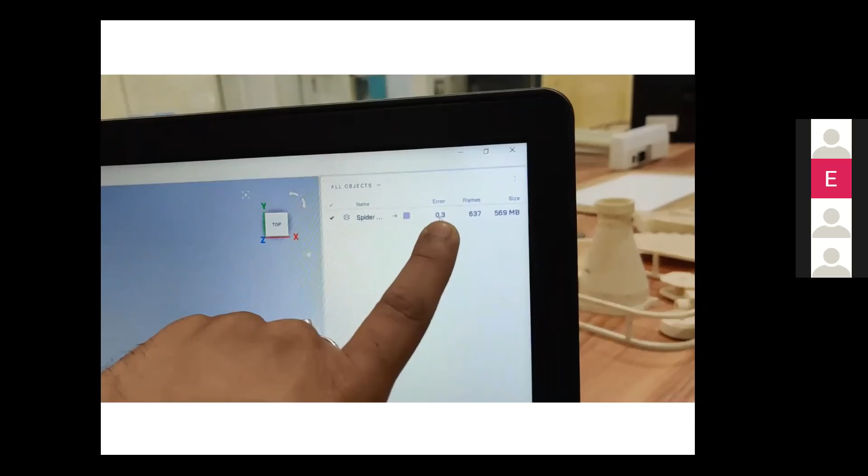See, our first scan is complete. Here you can see the error value is 0.3. In Artec scanners, every scanner has its own error limit. For this Space Spider, the limit is 0.3. A good scan is 0.2, but you can go up to 0.3. So up to 0.3 is a good scan.

Now this time I am going to scan it from another angle, just to capture all the surfaces of the part. This time I am going to scan by clicking this button upside once. See, now it starts previewing the part. If I click it one more time upside, it starts recording or scanning the part. See, while scanning you have to capture as much surface as possible.

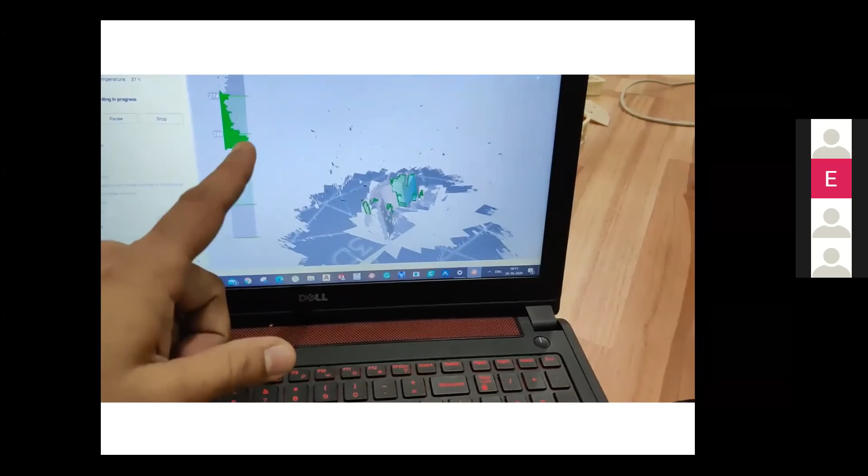As I said, when you go out of the range, it will show tracking lost. So you have to maintain the distance. Otherwise, in the end, you will be getting a higher error value. Okay. See, I am tilting this scanner to get as many surfaces as possible, but at the same time I am maintaining the left side bar, the distance.

See, I am tilting the scanner upside just to get all the faces. At the same time, I am maintaining the graph, the distance from the part to the scanner. The same way, I am tilting this.

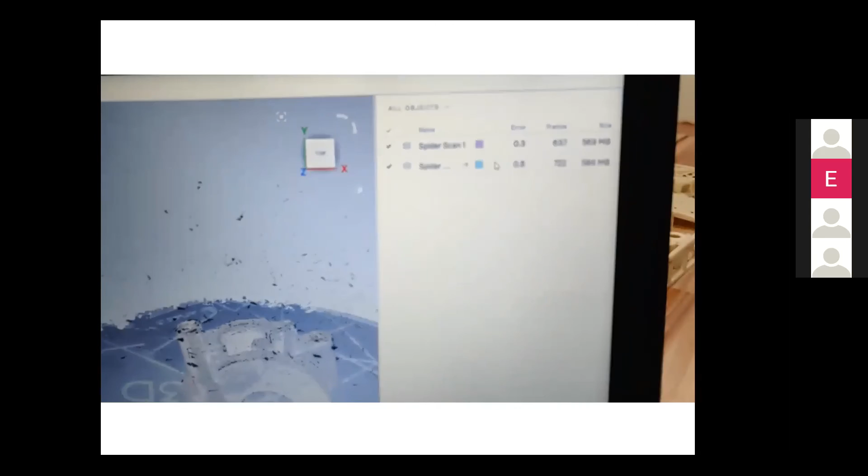On the screen you can see I already captured almost all the surfaces. Now I can stop the scan by clicking this button down below. It stops the scanning and it will take several seconds to map the textures. See, I scanned it. This time the error value is 0.8.

As I said, when you go beyond your range, it will show you a higher error value. So while scanning, maintain the distance and keep your error value as low as possible, or else after scanning you get the scan data, you have to double click and arrange the error data from higher to lower order. Then you get there is only one frame which is having 0.8 error value.

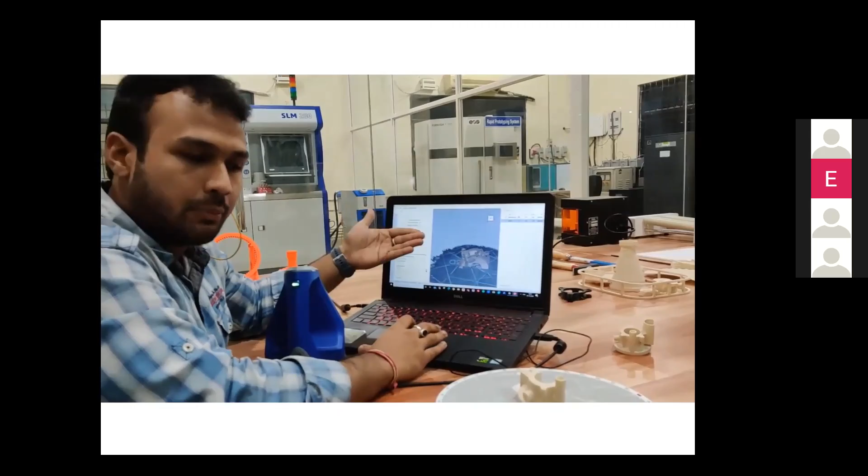So what you will do, you just delete the frames. And now your error value came below 0.3, within the range of 0.3. So now this scan is considered a good scan because the error value is within the limit. Sometimes if your error value is within the range but you are not getting the proper surfaces, then you have to rescan the part in such a way that your error value should be within 0.2. That is the main thing.

Here you can see there are 2 scan data. So here I want to tell you something regarding geometry and textures. If I click on geometry, it will scan your part, but when I click on geometry and texture, it will scan your part as well as the color the part is having. Both color and geometry, meaning the physical dimensions, are captured. So this is all about scanning, how to scan any part. The remaining post-processing things will be taken care of another time.

This is regarding the scanner, but after this you have to do post-processing. That means whatever file you get has a lot of errors. Those errors you have to remove, and you can do that in Artec 3D scanner software. Other popular reverse engineering software is available, like Geomagic and all those things. Using that also you can do the process. You can have a robotic held scanner also for getting more accurate results. So this is all in a nutshell what we have in today's demo session because the time is already over.